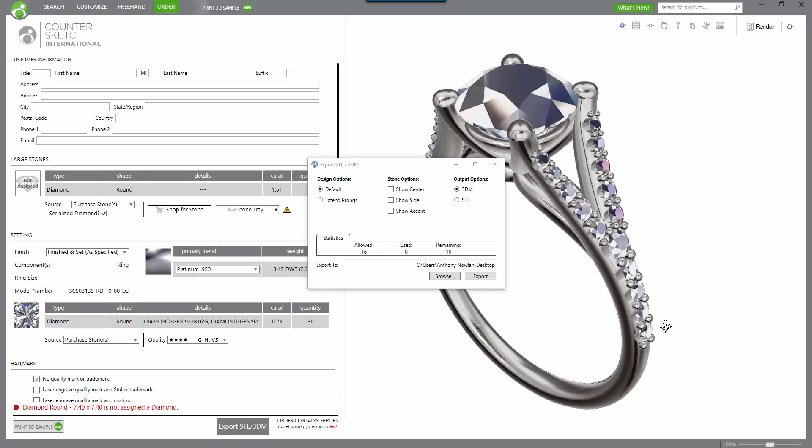So at the moment we can see here the design options here as the default for our claws. The default means that the claws essentially look as though they've been set, and that's for presentation purposes. Obviously when you're showing a customer, it always looks a little bit better if the claws are actually set over the stone rather than protruding upwards.

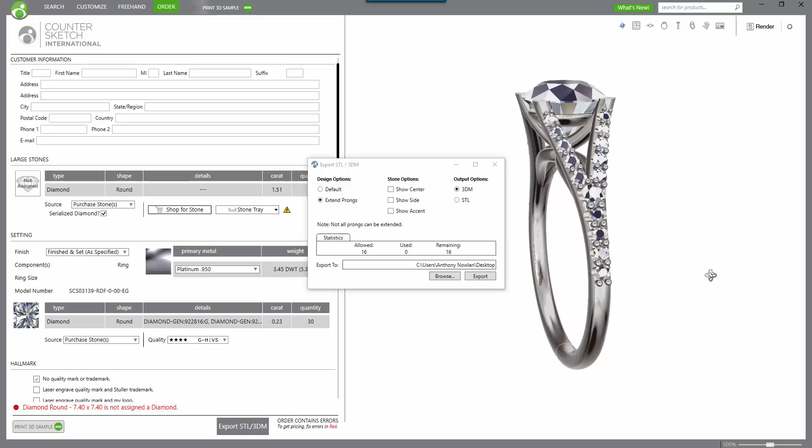So what we're going to do for manufacturing purposes, we're going to click on Extend Prongs. What that's going to do is it's going to prepare the design and extend all of the prongs that it can, so that everything's all ready for manufacturing purposes. Now you'll notice that here it didn't really do anything. This is where it's important when you import the model into Matrix, and we'll go through that in just a moment.

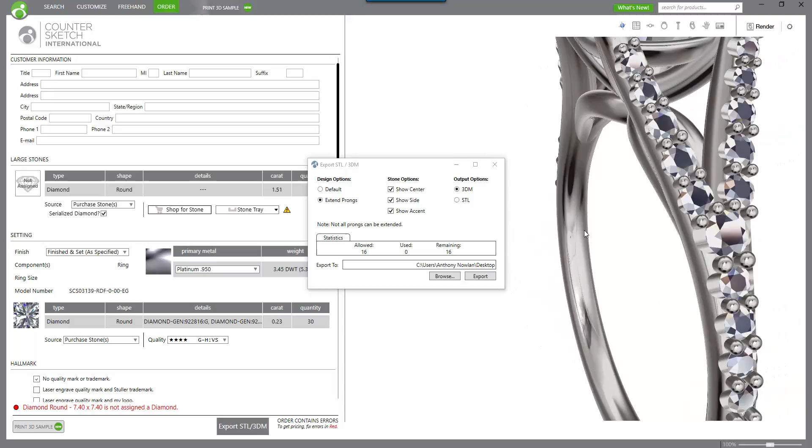So the other thing we're going to want to do is show the center, side, and any accent stones that might happen to be in the piece. I have a tendency to check all of those boxes regardless of whether they're all there or not. The reason I like to do that is that you'll notice that in this particular piece, there are no azures for any of the stones. So if that is something that you wanted in your piece, you would obviously need to take that into Matrix as well and create cutters and Boolean difference those from the actual piece.

I'm going to select the 3DM option here for output options. Main reason for that is that when I import that into Matrix, because I know I've got to do a little bit more work to this piece, it is a lot easier to do that kind of work to a 3DM file. An STL file is going to be a mesh,

and if you were happy with the way this piece looked and you didn't need any further modification to it, you could simply hit STL and then hit the repair mesh option there, which will unify the entire mesh, making sure that it's all one nice watertight surface, so ready for 3D printing. But in this case, we're just going to select the 3DM option.

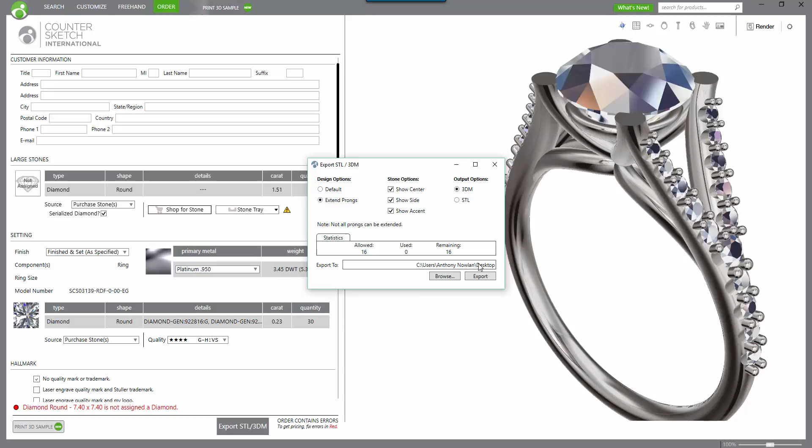Then you'd select where you want to export this piece to. Now I've selected my desktop. You can click on the browse and select anywhere you want. Just remember where you're actually exporting it to. I'm going to click on Export now. That will export this particular file, and then once that's finished, we'll open up Matrix. So we can click on that now.

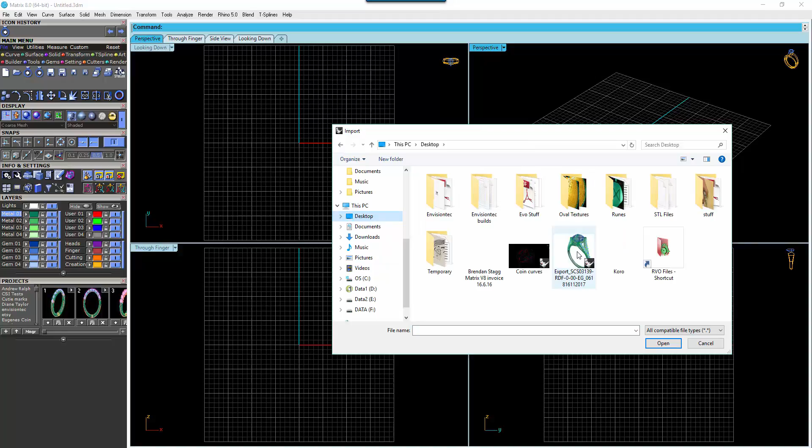Let's go into our Matrix software and go to File, Import. We know the piece is on our desktop here, so we're going to grab our piece, just double click it. That's going to bring the piece into Matrix here for us, and we have the piece here ready to go. Now, as I mentioned before, this is a 3DM file, which is exactly what we're after.

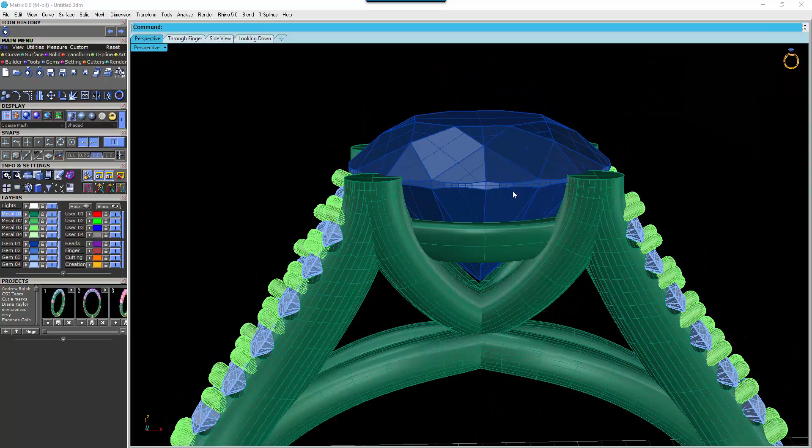We need to extend our surfaces, or these particular surfaces here, so that we've got a little bit of meat to play with. For this particular model, because we've got two poly surfaces blending into one, what I'm actually going to do with this one is go to my red layer color, go to the curve menu, and I'm going to duplicate an edge here. Just that edge there will be fine.

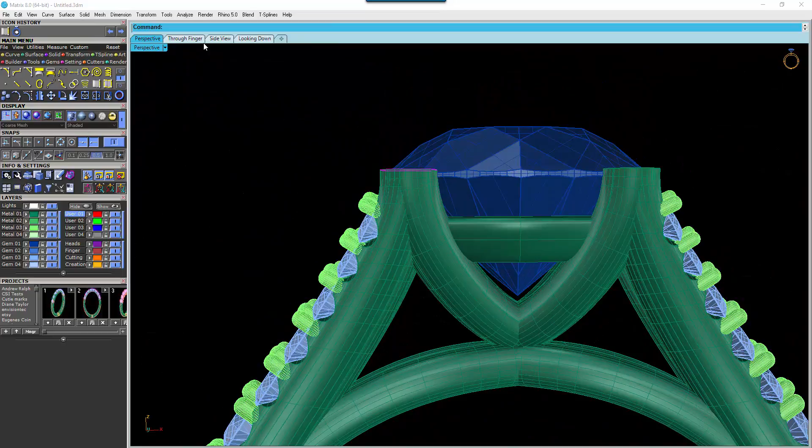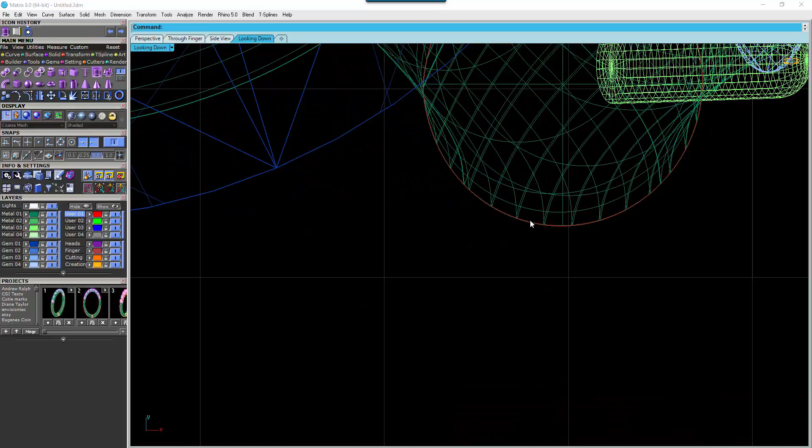Enter. And then I'm going to just go into the through finger viewport, use my solid tool, and extend that up just a little bit. Something like that is probably well and truly enough. And then once we've got that looking like that, we can just mirror around F4, select that piece there as well. That, not the red curve, sorry. Let's try that again. Let's select the actual surface that we want.

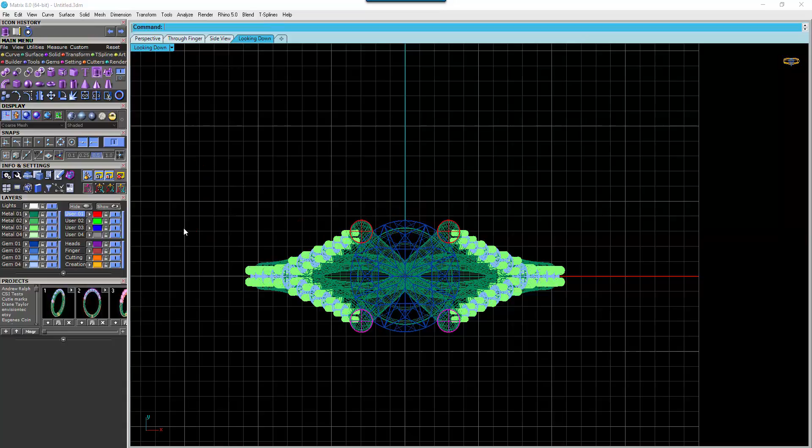Okay, so mirror around F4, shift. We're going to select that poly surface there, and then hit mirror again around F4, just for the top sections there. Alright, so what we've got there is something that looks like that. Now, as mentioned, none of the stones are cut into that. So if you wanted to create bearers or seats for these particular stones, we'd hit F6, go down to our gem cutter and select the gem cutter that you wanted.

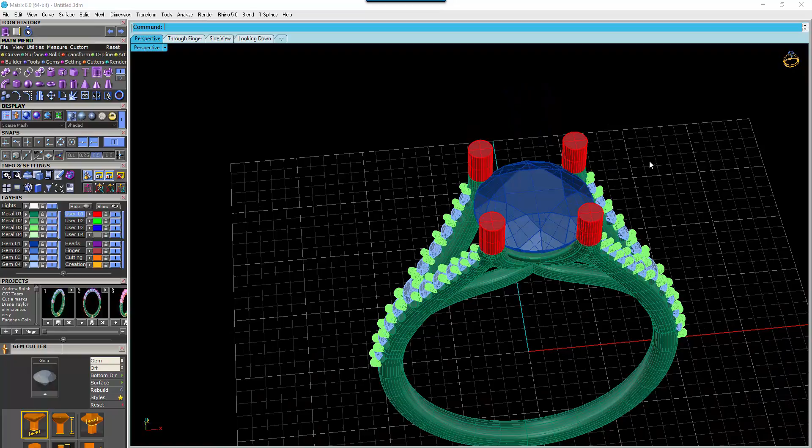Then you would adjust your handles as required and Boolean difference that away from the piece. So you'll get the idea of how that works. The next thing I'm going to do is, once I've finished doing all of my Boolean differencing, I'm going to delete my stones. I don't need those on anymore.

And we're going to select the entire piece, go into the Tools menu, and select our Mesh Repair option. This is going to unify everything here, so it's kind of like a Boolean operation, but it turns it all into a mesh. Delete input objects equals on, so we don't want a duplicate there, and then simply hit enter. What will happen is it will begin converting the 3DM file to a mesh file or an STL, and as mentioned, it will repair everything that needs to be repaired.

So any intersecting parts will be unified into the one piece. So at the moment, it's pretty quick. It's certainly not too slow. We're at 60% at the moment. This particular process, depending on the geometry, can take anywhere from, say, 30 seconds right through to a few minutes, just as I said, depending on the geometry of the piece. I'm just going to pause the video and, once this is finished, a window will pop up and we'll go from there.

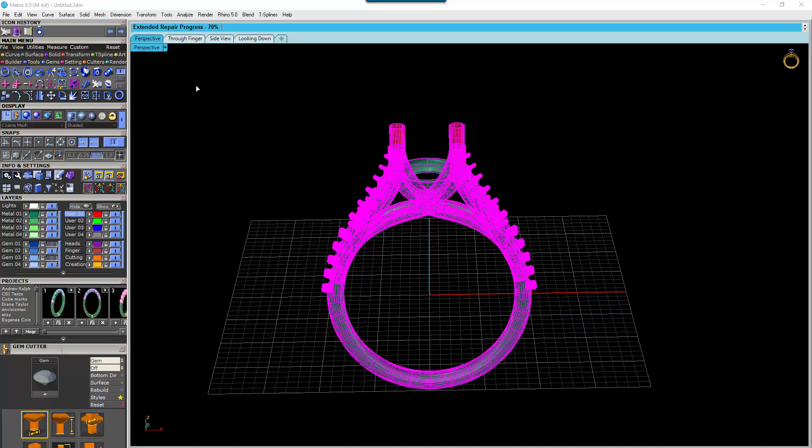Okay, so now that that's all completed, we have our window here. We can hit check mesh, and that's just going to make sure everything's all good. This is a good mesh. That's all you really need. Once you get that, we can shut that down. So now let's pop that in plastic mode, and maybe I'll put that onto a different layer color for the moment. And we have something that looks like this.

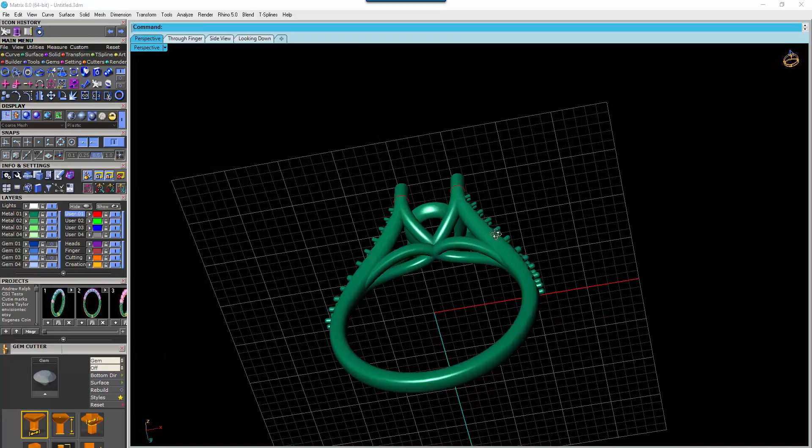Now, it's up to yourself as to whether you take this next step or whether you prefer to do this in your native 3D printer's software. Most 3D printers have support generation tools. Matrix also has a support generation tool, and so what we can do is we can go into our tools menu again and simply select our 3D printing option. Let's roll a few of these menus up.

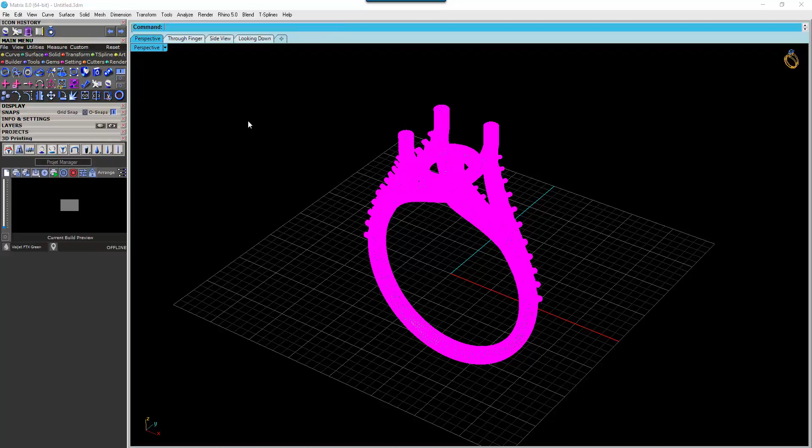And what we're going to do is we're first of all going to show the support regions of this particular piece, add the object. And what that's going to do is it will show us in red all of the areas that the software is actually recommending that we support. Now, depending on your 3D printer and also depending on the resin you're using will determine, I guess, how many of these supports you add. Lately, I've seen some resins that require virtually no internal supports, which is pretty awesome.

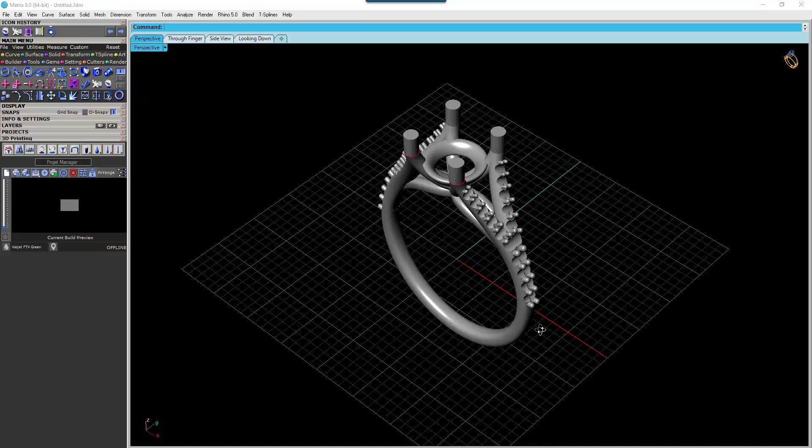So what we're going to do here is we're going to grab the ring, pop the ring support sprue option. In the command line here, we have all of our options that we can adjust for this particular sprue. If we don't want that height anywhere near as high, we can take that down to, say, maybe 4, and just continue adjusting options as we need to. I'm quite happy with that, so I'm going to hit enter for that.

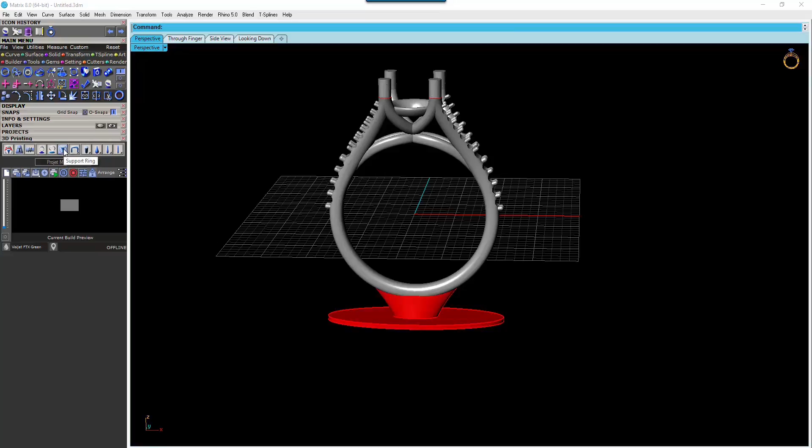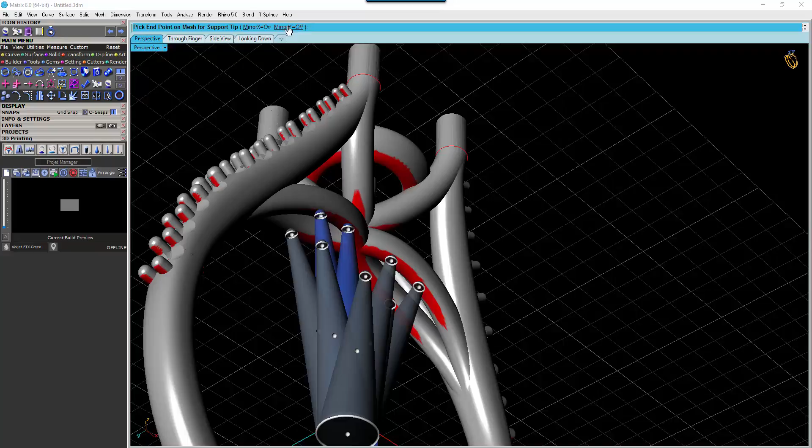As I mentioned before, some resins don't require this, but I'm just going to give you an example of how this works. MirrorX on, and we can just basically click where those red support layers are. So I'll turn off my MirrorY, oops, and maybe take that to something like that.

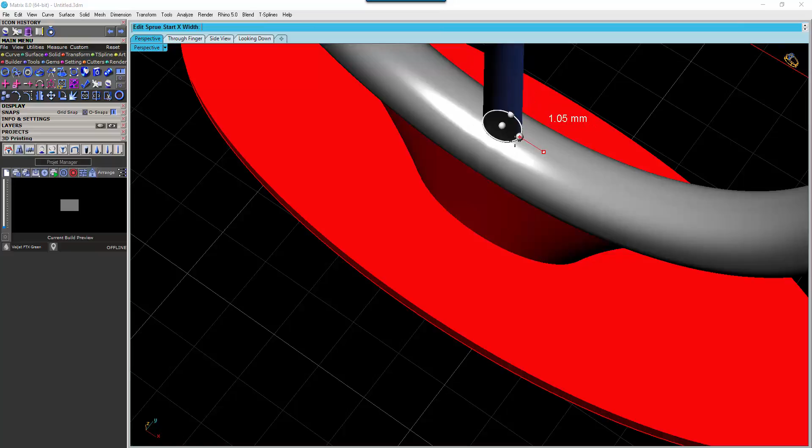Once we hit enter, we can simply come to this layer here and reduce that down in size to, I don't know, say about 0.8 or so. Do the same thing for the base. And then hit enter, and we end up with those kinds of supports.

Alright, so once we're happy with that, I always recommend that we run the mesh repair again. This time it'll be a lot quicker, because the supports are obviously polysurfaces. They need to be converted to an STL as well. So hit enter, that will repair that particular mesh for us, making sure that the entire thing, including the supports, is all ready to be exported as an STL file. Once that's done, then we simply go up into the File option and Export and go to STL, and I'll show you that in just a minute.

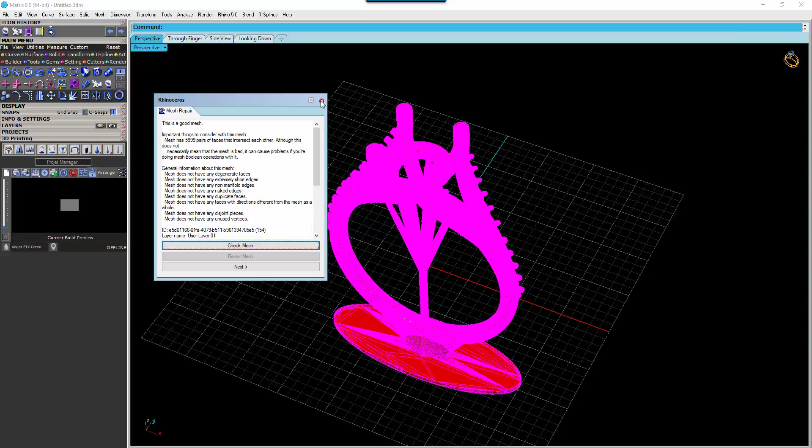So we'll get the window come up here. Again, we'll hit Check Mesh. It'll tell us it's a good mesh yet again. And then we're going to go to File, Export Selected, and we'll close that down just for a minute. I like to put this on my desktop here, and you want to select the STL option.

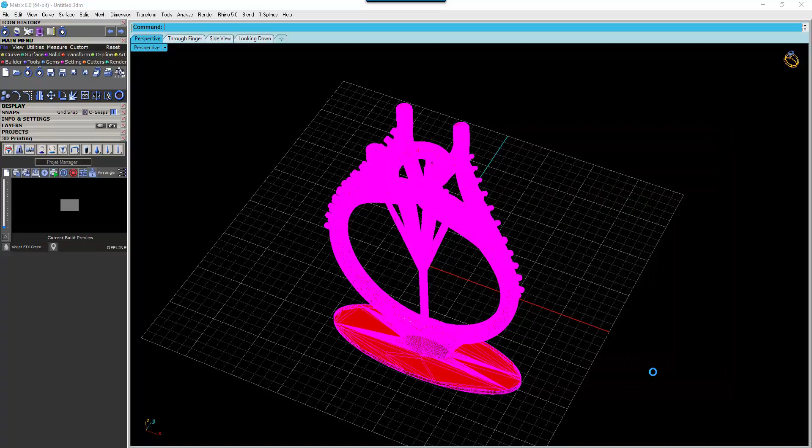The default that comes out is a Rhino 5 file, but we want to go to STL, give it a name, and hit save. When that happens, you're going to get a window come up here. All you've got to do is hit OK to that, and you will find that this particular file is now on your desktop or wherever you've saved it, ready to be input into your 3D printing software and therefore print it up. Hope that helps.